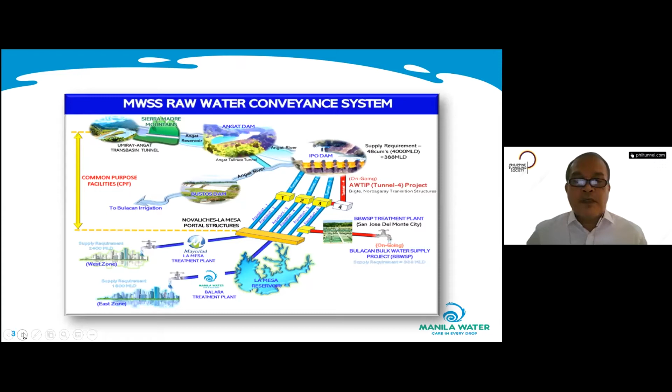Next slide, please. The water system of MWSS, our principal, started way back at the middle of Sierra Madre to Umiray River. Then there's an aqueduct that connected it to the Angat Reservoir, and then Angat Dam. Then it goes to a secondary dam called Ipo Dam. There are a series of tunnels that would connect Ipo to what we call the Novaliches portal, and from there, a series of aqueducts that convey the raw water to La Mesa. So some would go directly to the La Mesa Treatment Plant, operated by the other concessionaire, Maynilad, and the other 40% of the raw water would go to La Mesa and then to Balara.

Next slide, please. So from La Mesa Reservoir, there are 3 aqueducts that supply the raw water requirement of our 2 treatment plants there, Balara 1 and Balara 2.

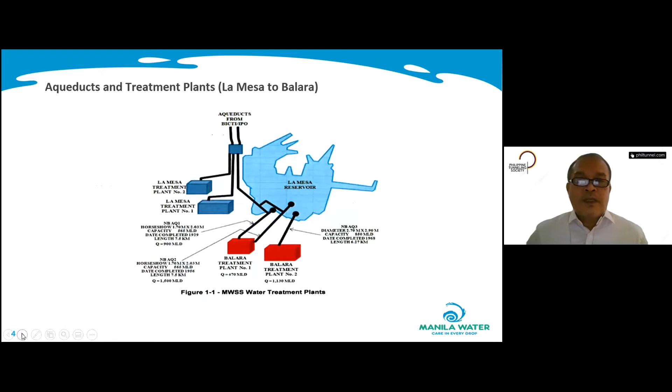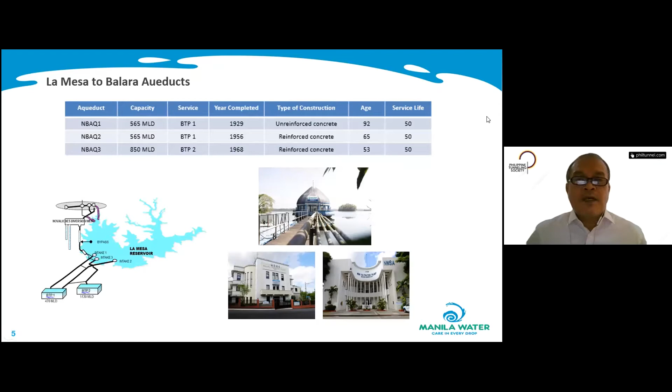Next slide, please. And as you can see, this is why we need to do NBAQ4 - the 3 aqueducts have actually exceeded their serviceable age, so there's really a need to replace these old aqueducts, which I will explain further in the next slide.

Next slide, please. The project was conceptualized as part of Manila Water's improvement and expansion projects throughout the concession area. We've already completed the potable distribution side - we've replaced more than 90% of the pipes on the potable side. Now we're focusing our attention on the raw water side. As I mentioned, there are 3 existing aqueducts that convey water from La Mesa to Balara that were built between 1929 and 1968.

That requires assessment and rehabilitation. Currently these aqueducts are being operated at capacity and cannot be shut down, because if we shut down one of them, the water supply in our concession area would be limited. So this project will improve the reliability and security of raw water transmission from La Mesa to Balara. It will provide a new aqueduct that will enable sequential temporary service suspension, inspection, rehabilitation, or replacement of these existing aqueducts. It will provide redundancy in case of failure of one or more of these 3 aqueducts, and will allow operational flexibility in the operation of the treatment plant.

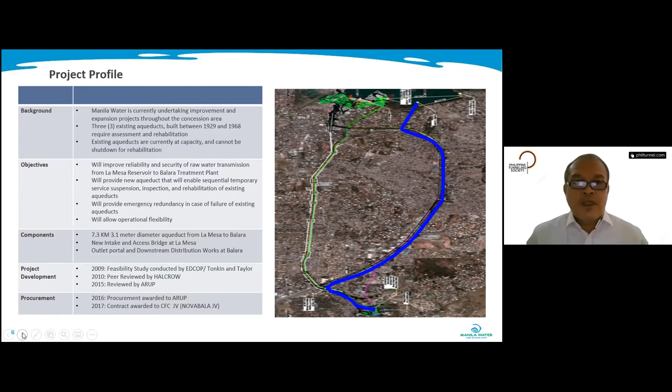Now I turn over the presentation to Rod to discuss the construction side of the project.

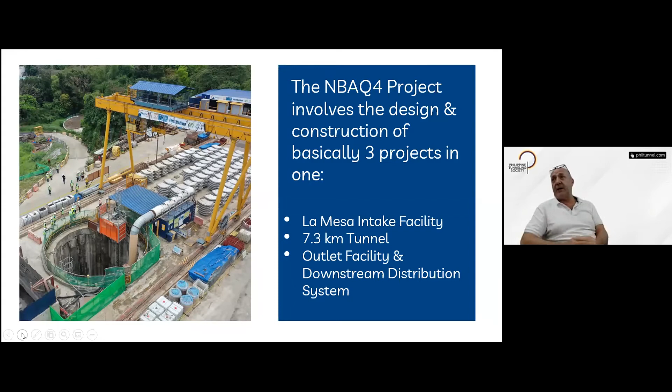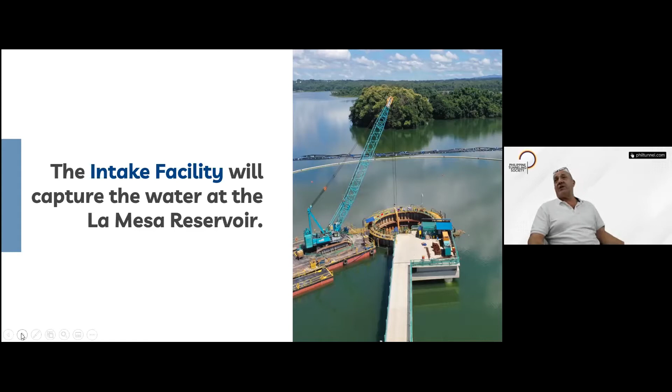The intake facility is a complex structure at the end of an access bridge in the middle of the La Mesa Reservoir, which is actually a very beautiful location on the northeast side of Manila, capturing all the water from the Sierra Madre Mountains through a series of dams and ending up in the reservoir. We built an access bridge and a very complicated temporary intake cofferdam, which allowed us to finally build the intake structure, which is actually the receiving pit for the TBM machine at the end of the tunnel.

Then, of course, we have the tunnel, which all you tunneling guys are massively interested in. It's the tunnel which will eventually channel all the water from La Mesa to Balara. It's 7.3 kilometers in length, travels the majority of its length under Commonwealth Avenue, and is generally about 50 meters below ground.

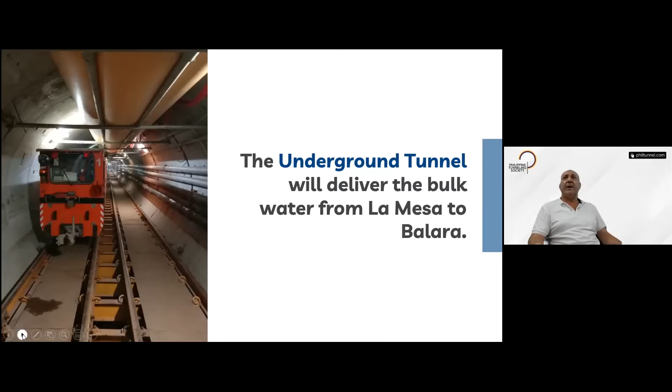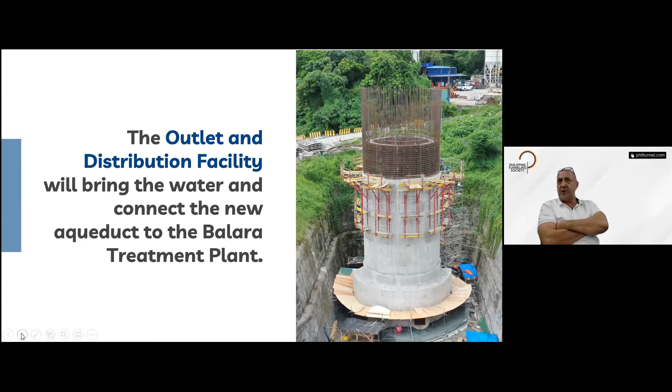Then, as I mentioned earlier, the downstream distribution system. Here you can see the outlet structure, still under construction. This is basically a surge shaft at the end of the tunnel where the water will rise from the tunnel, which is actually about another 35 meters below the structure. The water will rise vertically and then be distributed through a complex arrangement of piping, chambers, and such like into the treatment plant. So as I say, it's actually three structures, three projects, all tied into one.

Going back to the early days of 2017, there was a monumental amount of design work required to develop what was the concept design, initially developed by Arup. Once we secured the contract with our designer, GHD, they developed all of the designs for this complex project, using CFD modeling for all the hydraulic analysis from the inlet, the tunnel, and through all of the outlet structures.

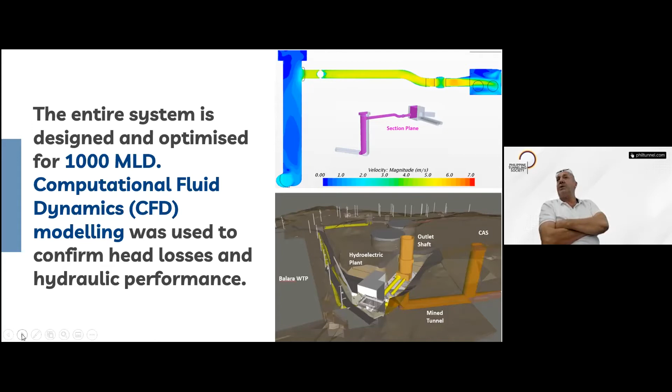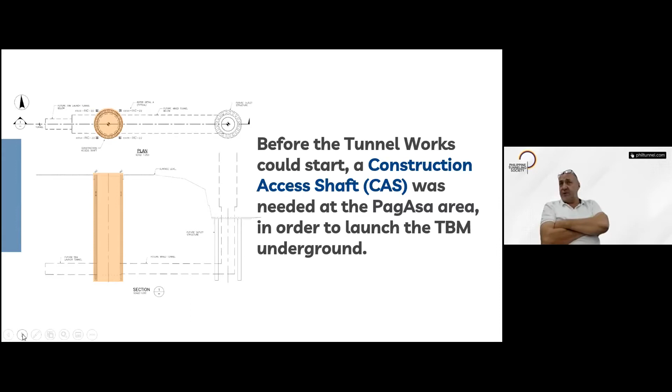After the design had been completed, which took a few years, the tunnel works could only start in the Pagasa area. In order to start, we had to sink an access shaft. Here's a simple schematic of the access shaft with the arrangement and connection to the outlet shaft, which you can see on the right-hand side of that sketch. That was built so we could install all of the equipment in the tunnel and assemble it to then commence the tunneling operation from Pagasa through 7.5 kilometers to La Mesa.

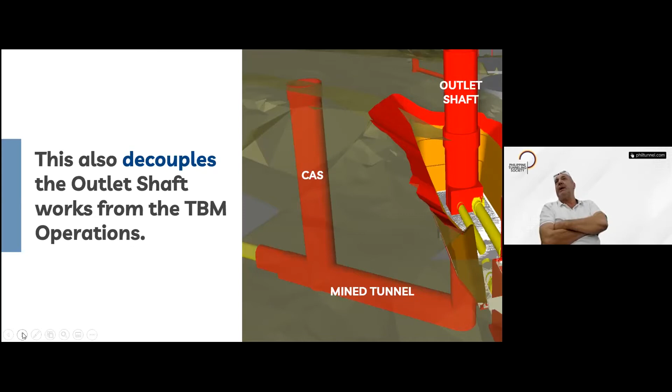Now, the outlet shaft also served as a structure, and the mined tunnel, which allowed basically the decoupling of the tunneling operation and allowed the DNS system to also be constructed separately and in parallel, all at the same time.

Now, the initial plan at the design stage for the outlet shaft, and even the access shaft, was excavation and then traditional bolting and shotcreting. But that method was never workable due to the soil conditions, so eventually the access shaft was sunk using a secant pile wall.

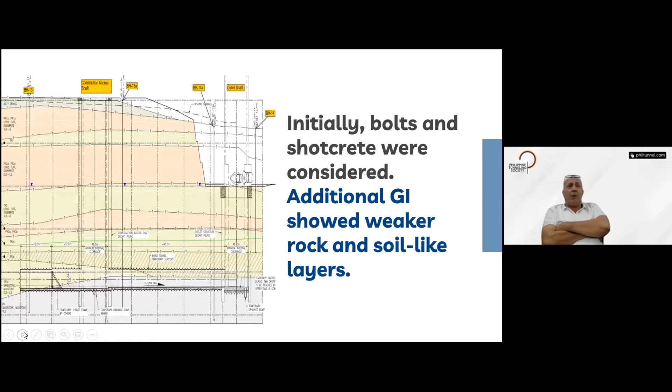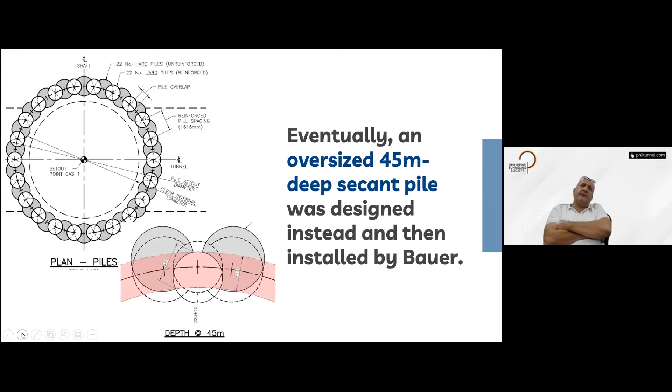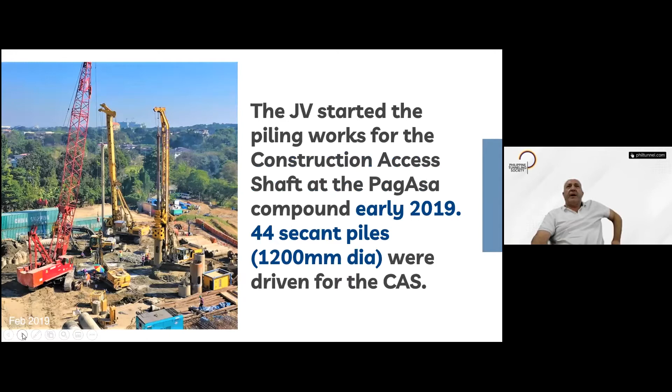Secant pile wall configuration. Here you can see a general layout of the pile layout that we used. This was basically a 9-meter diameter shaft with 45-meter deep secant pile walls, which was constructed by Bauer as our subcontractor, successfully back in 2019. And here we see a photograph of all these piling rigs from Bauer sinking the secant piles for the access shaft in order to allow tunneling works to eventually commence.

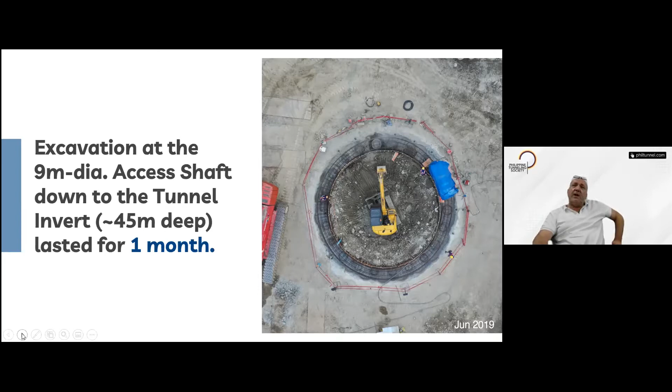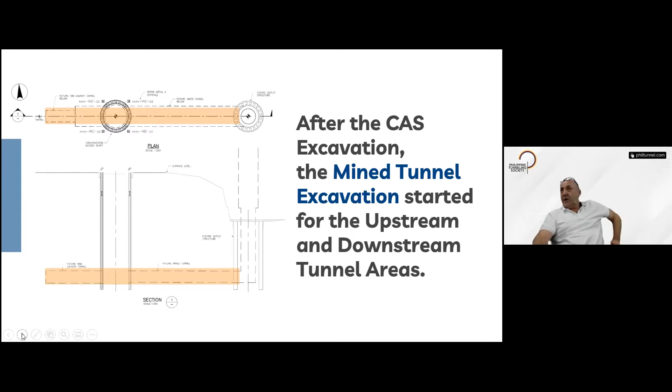Back in the early days, after the access shaft had been constructed and excavated, we conducted traditional forepole umbrella and drilling activities to excavate, with traditional methods, the mined tunnel section, which was just under 70 meters in length.

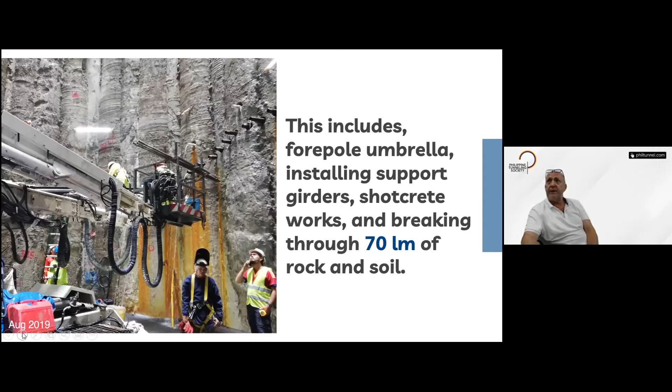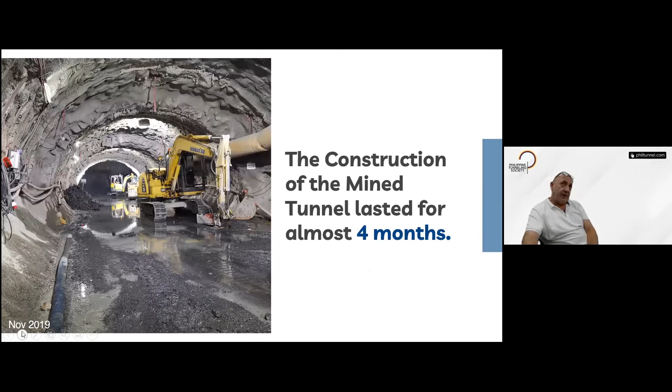Here, back in the early days, you can see the mined tunnel with all the supports, just ready for final excavation and cleaning, ready for installation of the rails and ready to receive the tunnel equipment in order to progress with the main tunneling works. That took approximately 4 months to set all of that up after completion of the access shaft.

And now you can see here where we then installed the rails and started installing our equipment, the locos and man carriers, for final access to assemble the TBM in the mined tunnel section and allow it to project through and carry forwards with the main tunnel.

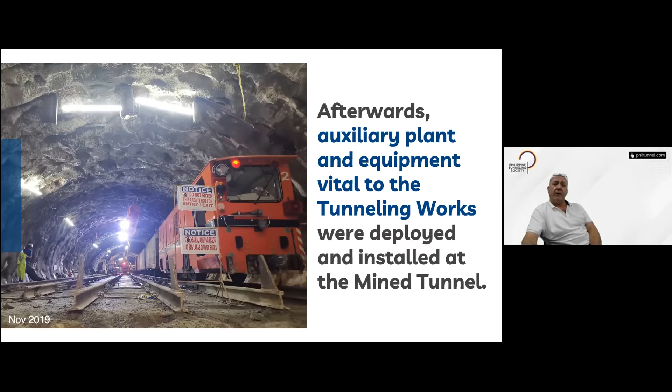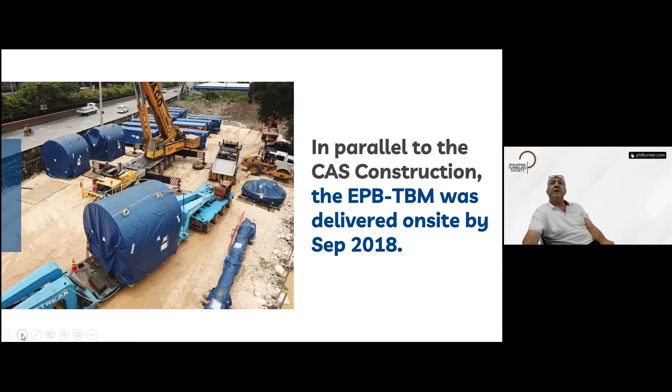Now, here is Dalisay, the TBM boring machine used to construct the NBAQ4 aqueduct. It's an EPB TBM. We purchased it as early as 2017, long time ago. It was delivered in 2018 through Herrenknecht of Germany, one of the world leaders in tunnel equipment. But this machine was actually constructed and fabricated in China, shipped here, brought to site, and assembled in preparation for the early works, with the tunnel commencing in 2019.

Here's an early picture of the TBM machine. As you can see, this is the main part of the TBM machine. It's about 12 meters long. It weighed in total, including all of the support structure and equipment that runs with it, which reaches close to just over 110 meters long, an all-up weight of 266 tons. But this is the main head of the TBM machine, cutting through to the main section and tail skin.

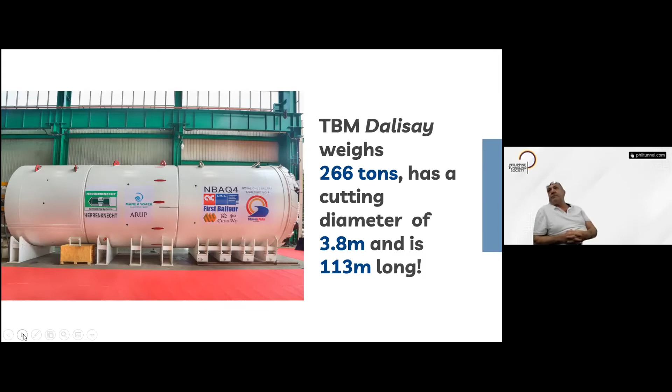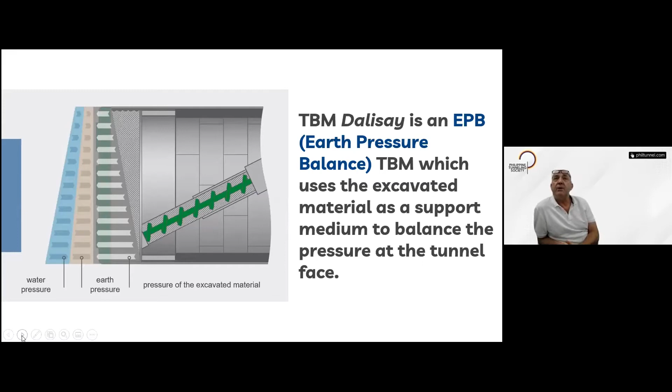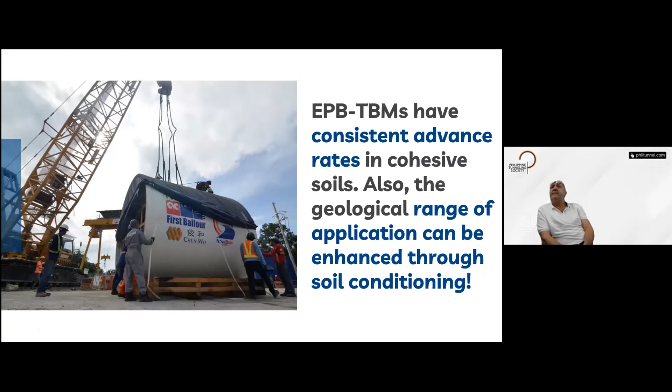So the TBM was eventually launched through the access shaft in January 2020. As you can see here, this is just one section of the machine of 3. They were all lowered down the access shaft and then reassembled along with all the backup gantries and support equipment, which are close to 110 meters long, in order to proceed with the tunneling operation.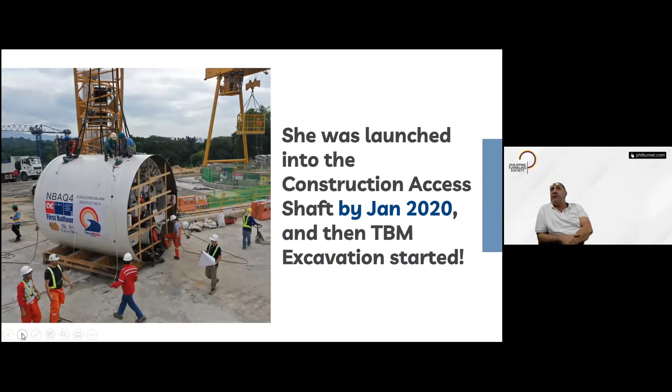Again, here is a sectional view of our TBM. It's actually an articulated TBM, because in this particular tunnel we had very, very tight bends to navigate in 2 sections, approaching and leaving the underground areas of Commonwealth Avenue. Those tight bends resulted in an 80-meter radius. Therefore, to be able to excavate and turn around those tight bends, the machine basically had to be able to articulate. That's why the machine had 3 main sections, allowing movement for negotiating these tight curves.

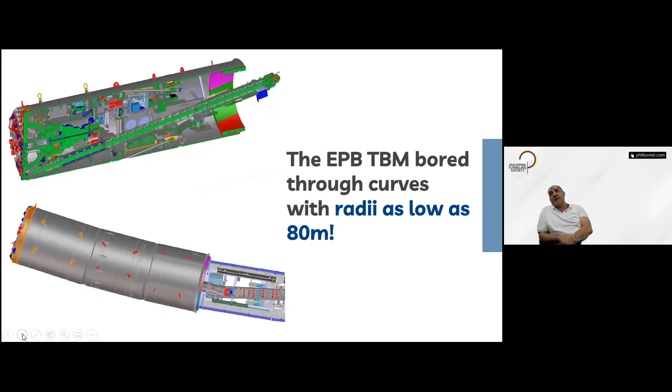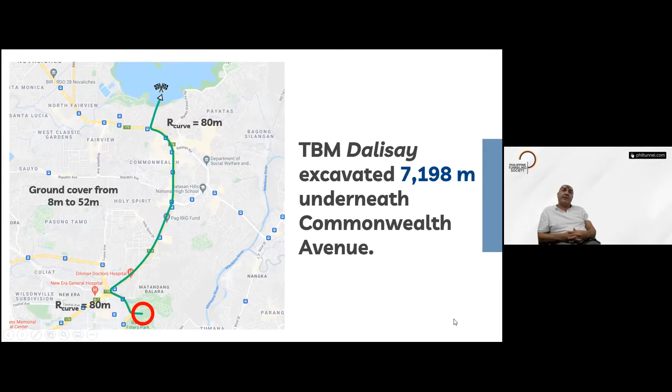Now here you go, is a lovely overview of where we are in Manila, from Balara down the bottom at the Manila Water Treatment Plant. You can see where we come out under the C5. We turned the tight bend, 80-meter radius, onto the Commonwealth Avenue, and we've travelled all the way up under the Commonwealth Avenue, adjacent to the MRT7. Very, very challenging tunneling works. And you can see at the end, turning off again with a very tight radius, and eventually carrying forward into the La Mesa Reservoir.

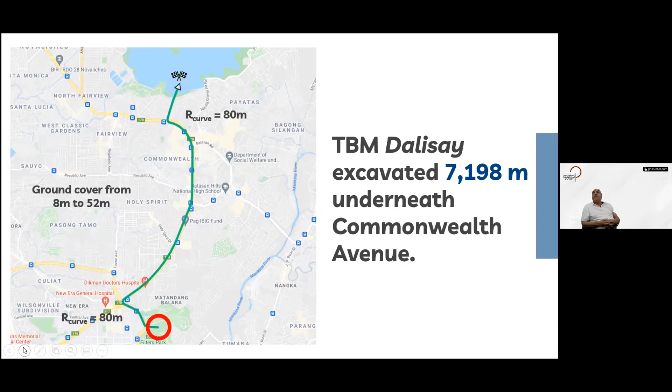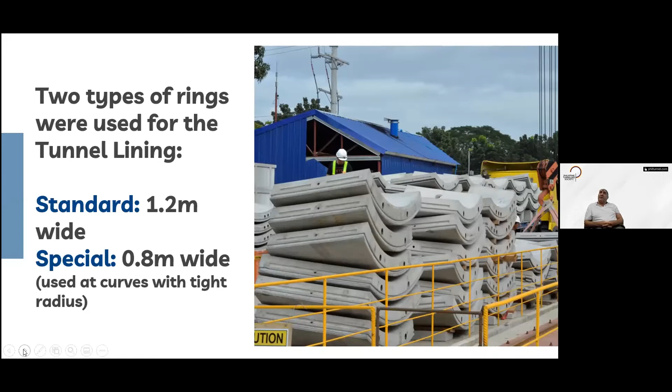Now, in order to line our tunnel, we had to precast thousands of panels. These were successfully precast in a specialist precast facility by First Balfour, and they achieved fantastic results in quality, producing 2 sizes of panels: the 1.2 meter panels for the straight, slight curved sections of the tunnel, and then reducing to 0.8 meter wide panels for where we had to negotiate the tight curves. All of these panels are placed by the TBM machine as it's excavating and cutting the tunnel path.

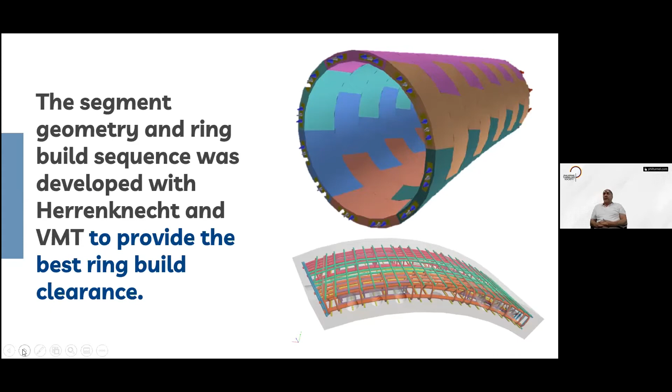Now, the segment geometry and build sequence was developed specifically with Herrenknecht, the manufacturer of the machine, and also VMT, who are the providers of the guidance system. They came up with a very complex and analytical approach and optimized the panel array, as you can see in these sketches, to give the best finished product for the precast concrete lining of the tunnel.

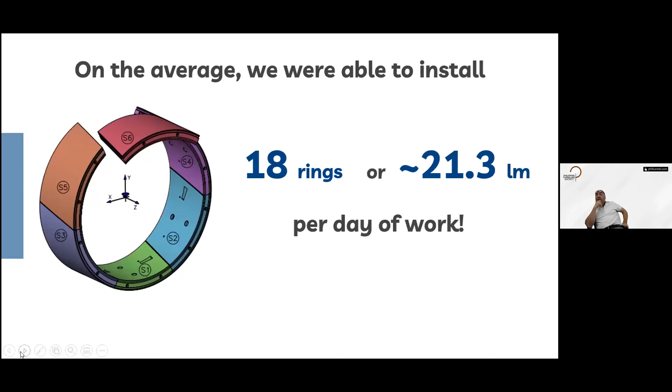Now, the production rates that we achieved on this tunnel were remarkable. We exceeded the tender expectations by far. And I think one of the most fantastic achievements about these production rates is that they were achieved entirely through the COVID lockdown period of 2020 and 21. We achieved an average of 18 rings, which equates to just over 20 meters per day of work, which exceeded all expectations from what was envisaged at tender stage and moving forward.

It created massive challenges and issues, not only for this project, but for all projects and for everybody's life in general in Manila. But we're very proud to share this achievement, and what our tunnel team achieved was fantastic. We had breakdowns, we had issues, but we persevered and managed to produce these amazing outputs with our TBM machine, which is all down to various aspects: correct design, investing in the correct machine with the correct methodology, and having the correct people, experienced tunneling crews to produce these results.

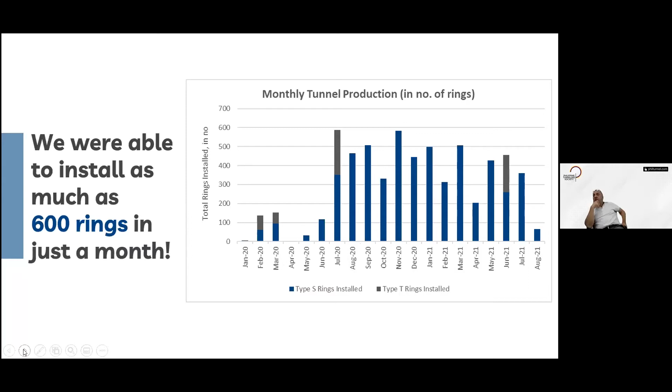So we'll move off from the tunneling and on to one of the other parts of this project, and that's the La Mesa intake.

Now you can see here, back in 2019, Manila had a massive water shortage, and this is an aerial shot which shows La Mesa Reservoir at that time and the existing intake structures with such low water levels. What's also amazing is that La Mesa Reservoir is a natural catchment area, but it's also a dam. On the right-hand side of this aerial shot, you can see this intake structure, which was built way back in the 20s as an earth-filled dam, built nearly 100 years ago. And 100 years later, we've just built a tunnel into that La Mesa Lake.

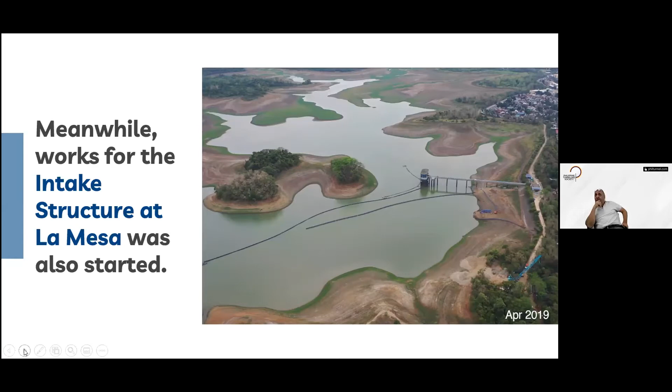Remarkable. So one of the biggest challenges of this project was getting out into the lake where we could build the intake structure. The intake structure had to be in the deep section of the lake so that it could operate at all operational levels of the La Mesa Lake. So we had to build an access bridge, and we increased the dimensions and structure overall so that we could use it eventually as a construction route to build our intake structure and temporary cofferdam in the lake.

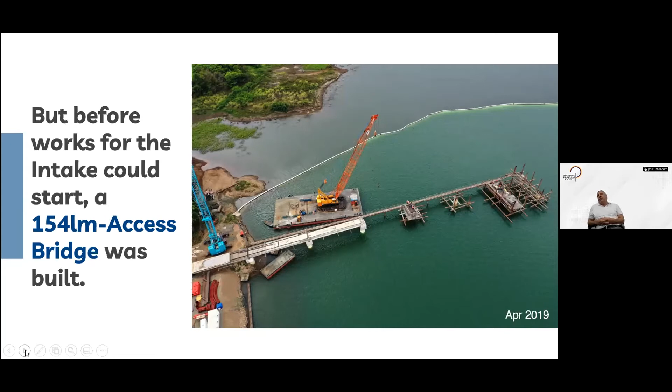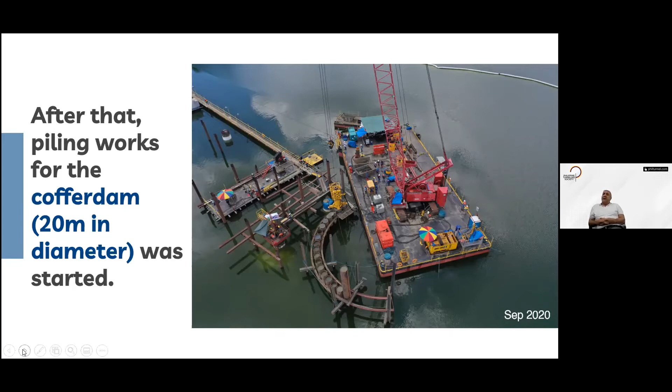Here you can see the access bridge still under construction. And here you can see our construction equipment, our barges, piling hammers and cranes, where we commenced driving of the cofferdam. The cofferdam was built as a 20-meter diameter temporary structure in 15 meters of water, in order to provide the correct environment for us to eventually build the intake structure and receive the tunnel boring machine.

Here you can see the cofferdam after we had constructed it, and it consisted of 56, 25-meter long steel casings, about 950 millimeter casings. We were able to drive all of those piles and sink them into the underlying strata of the lake and close that circular cofferdam. It was a fantastic achievement, done in just under 7 months. And here you can see when we started pumping out to give us access to the lake bed in order to allow construction of the intake structure.

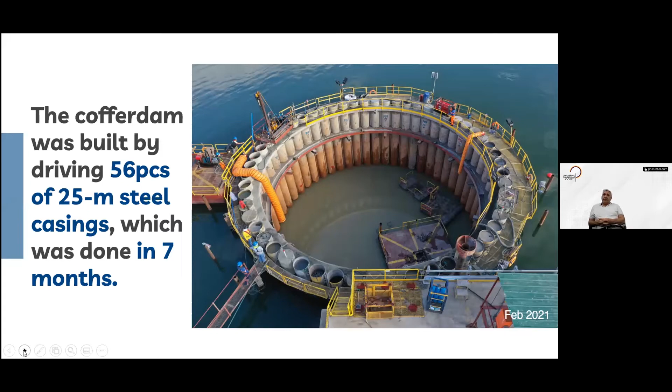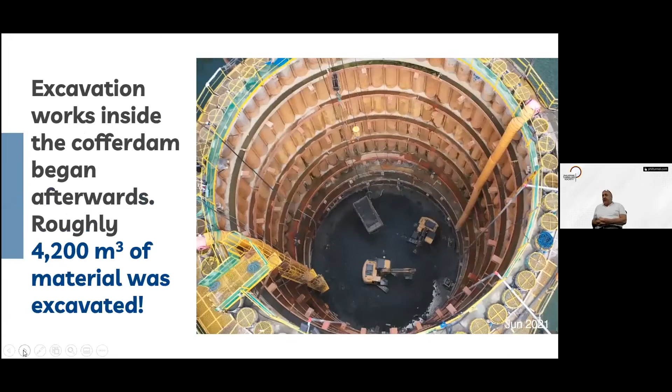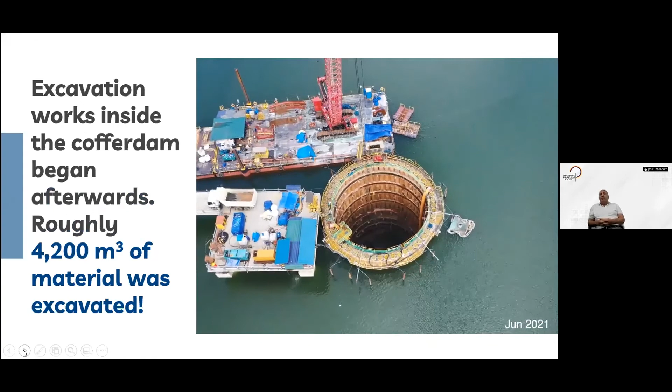Here, a short video of the excavation process. Once we got to the lake bed, at 15 meters depth, we had another 4,000 plus cubic meters of material to excavate out of the lake bed into the hard strata below to provide the eventual receiving structure and pit for the tunnel boring machine.

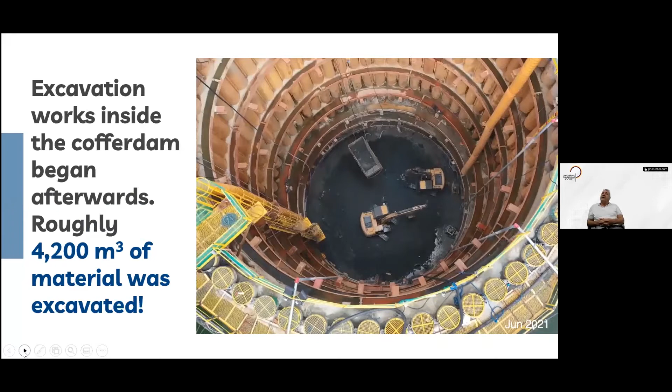After excavation of the cofferdam and lake bed, we then constructed this receiving pit, which allowed for the eventual cutting through of the TBM under the lake and into the dry environment of the La Mesa intake structure.

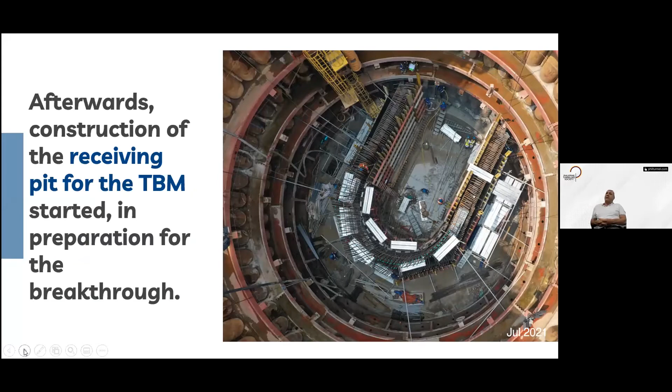And here you can see the successful day inside the La Mesa intake structure when the tunnel boring machine eventually broke through in early August of this year. That was 18 months after commencement, and basically it was built in just under 16 months.

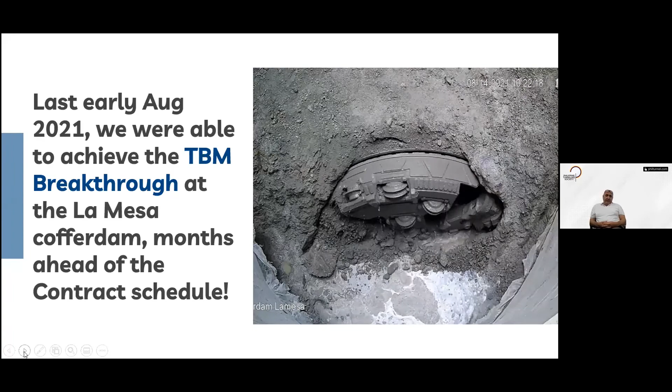It was a fantastic achievement, 16 months for the Dalisay TBM to excavate from Balara to La Mesa Reservoir. We actually achieved that approximately 4 months ahead of the predicted contract schedule, which was without doubt a fantastic achievement.

In order to celebrate that achievement, we carried out a virtual ceremony, a virtual breakthrough ceremony, because we were unable to invite all the guests and witness the true breakthrough at the time, due to the onslaught of the ECQ and restrictions in place. But the virtual ceremony was very successful.

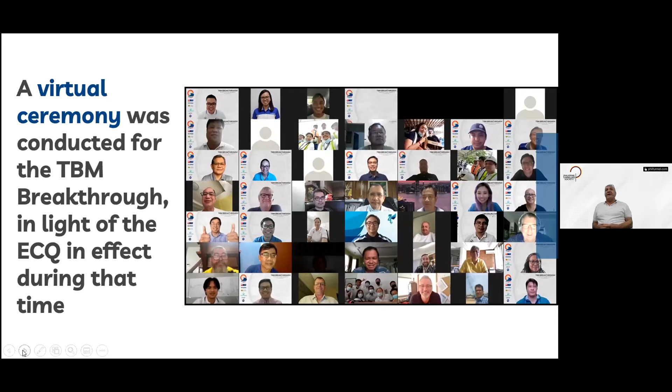We had hundreds of people online, and here you can see a lot of the pretty faces who joined in on that show.

After the event, Manila Water proudly announced the facts, the results, and the success of what, without a doubt, for Manila Water was the closure of a 10-12 year plan and a massive risk and a massive cost. There was a lot of relief when we managed to achieve a breakthrough of the tunnel in early August last year.

It was the succession of all of the thought process and ideas and dreams of Manila Water, and this was the fruition of all those hard work and dreams of all of those senior people in Manila Water from years ago.

After completion of the breakthrough and TBM machine arriving in our cofferdam, we then had to dismantle the TBM. That was a complex task also, because this machine really wasn't built to be dismantled.

It was built and assembled in major sections to be put together in a very simple way at the beginning. But the actual thought process of dismantling it took a lot of thinking out and working out, and very tricky, heavy lifts, because all of this has to be done in the marine environment, stripping the machine part by part.

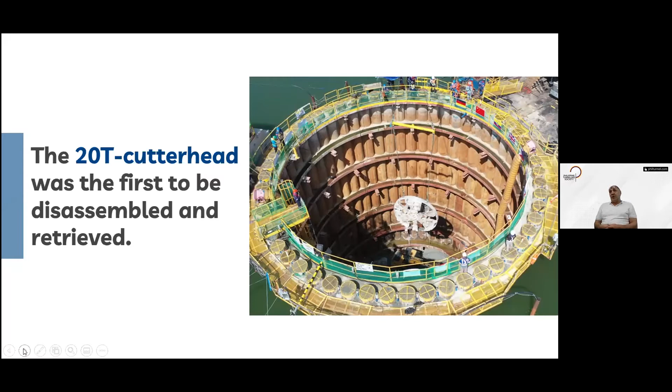Here you can see the cutter head, and the cutter head alone was a 20-ton piece of machinery, which had to be lifted out from the crane on the barge, lifted to another barge, and then dispatched to the shore for eventual travel back to Balara, where we are now currently reassembling the machine for its next challenge in life.

Here you can see the final sections of the machine being dismantled and ready for lifting out. We've just achieved that over the last few weeks. It's a fantastic result again, successfully removed, and we're now hard at work building the intake structure from this pit above in the depths of the La Mesa Lake.

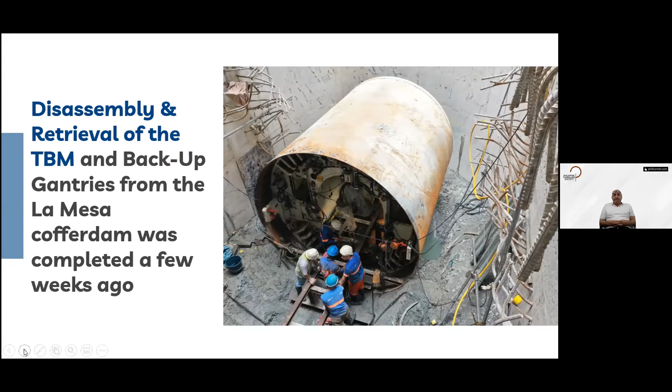So we'll step back now from the tunnel and the La Mesa Reservoir, and we want to discuss another tunneling aspect of the NBAQ4 project, where in the downstream distribution network system we have kilometres of pipes to lay at great depths, 10, 12 metres below ground, and there were sections that were impossible to be excavated.

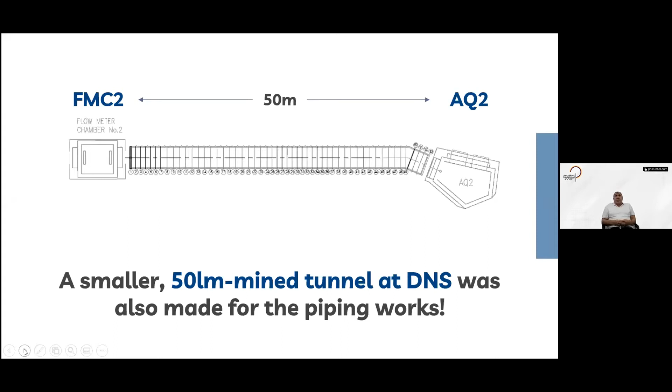The eventual solution was to come up with a traditional 50-metre mined tunnel between two areas of the downstream distribution network. This was also done very successfully with our team using traditional mine tunnel methods.

We created the open pit access shaft area here. We did traditional drilling and excavation by machine, and achieved good productivity in a safe and successful manner over this 50-metre mined tunnel excavation.

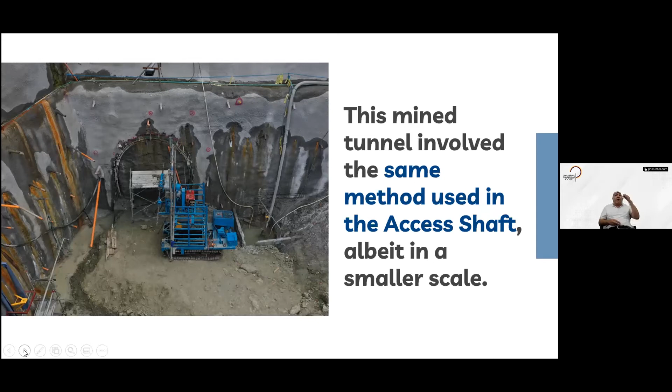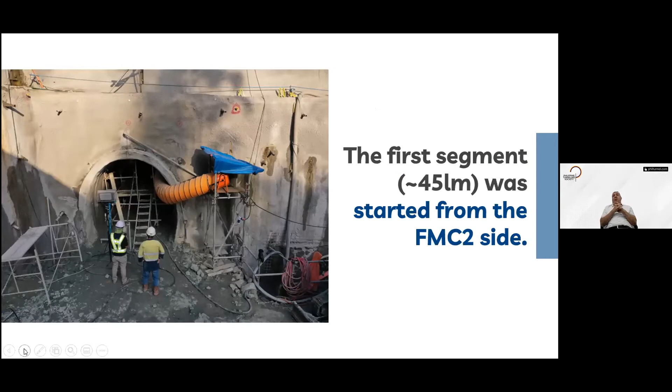So we actually constructed the tunnel from two sides. We commenced from the west side and excavated about 45 metres of the tunnel. We did that in order to get ahead, because at the other end of the tunnel we still had a major area of excavation.

So we took advantage of pushing ahead and putting 45 metres of the tunnel through in order to allow us, when we did complete the excavation at the AQ2 side for the major pipeline structures and connection areas, to then break through the last 5 metres of tunnel and connect the tunnel up between this 50-metre section.

That took us about 3.5 months, and again was a great achievement, all achieved in a very safe and successful manner.

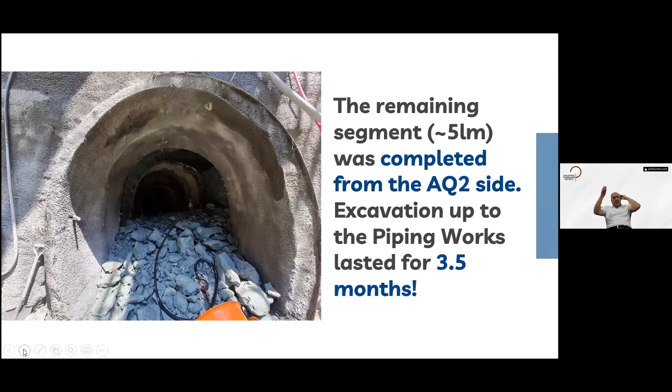Approximately 12 to 15 metres below the overlying structures and ground, that's basically an explanation of what's been done to date. The tunnel is now complete, and it's going through the dismantling of all the utilities and pulling out all of the equipment and final inspections while we construct the second part of the project, the La Mesa project.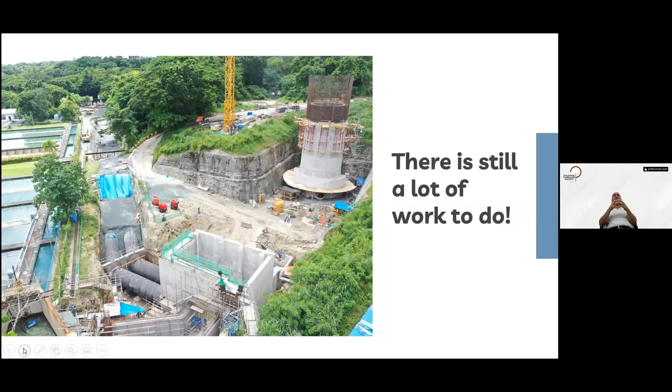Now, the existing utilities that are in place are aqueducts that are supplying water from La Mesa, that were built, in some cases, 70 years ago.

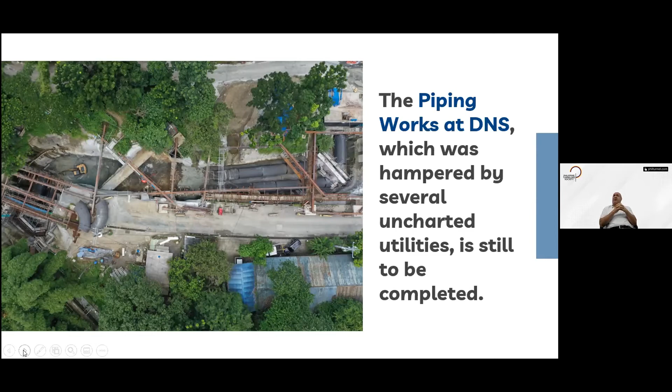You can see here in this aerial shot, again, the new pipework that's being installed in these open excavated trenches under existing utilities, which are, in some cases, 60, 70 years old. And we've had to put in place massive temporary structural steelwork supports in order to support all of these utilities. And like all projects, a lot of these utilities were unknown, which created additional challenges and interest for the project.

Again, here you can see some of the structures. And this is actually the end of the main tunnel section. The main tunnel section is underneath the ground on the right-hand side of the structure, to the right of that major structure there.

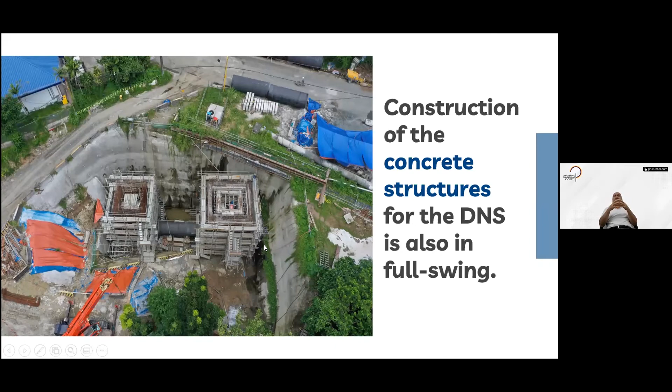So once we complete the network of downstream distribution, we have to connect these structures into the existing live waterways that are providing Metro Manila's water supply, because we can't turn it off. So these are some of the challenges that we face.

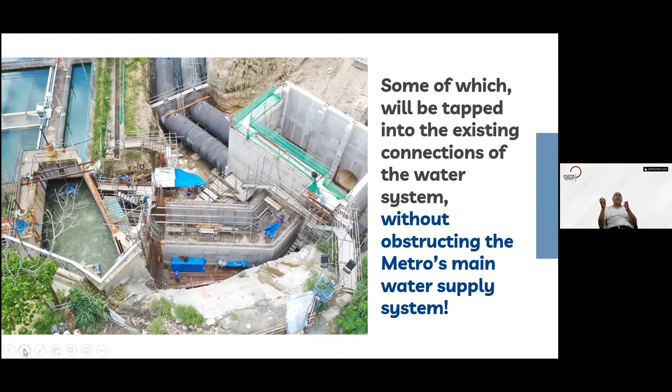We've got 3 live connections to construct. We've got a very, very complex temporary works arrangement designed that we will insert and construct inside the live pits, which are running at full capacity with water, because we can't turn the water supply off to Manila. And we will break through into the existing structures in a live condition to eventually allow the connection of La Mesa and the NBAQ4 pipework system to supply water into the Balara Treatment Plant.

So back to our intake structure. The TBM has now been removed, and here we're just doing the final cleaning out and ready to start the first construction lifts: concrete rebar, traditional walls, circular shaft, which will also contain the access gates to control the water flow in and out of this system.

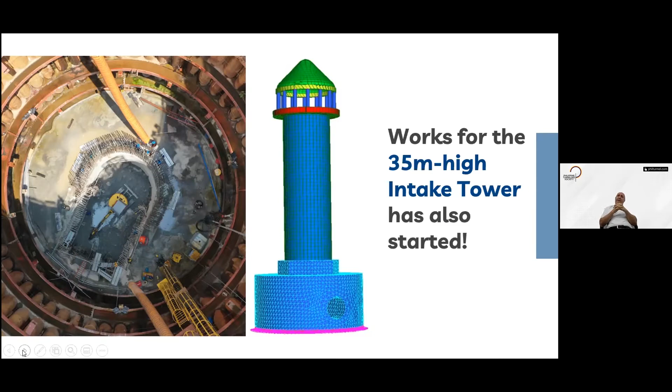And eventually, this magnificent structural steel cofferdam that we took 7 months to build will eventually be removed, and a concrete intake structure will be left in the La Mesa Lake.

Now, the next stage of our project at the moment is the complex electromechanical installation. So all of this magnificent civil work, tunneling work, marine work is basically coming to an end by the end of this year. And in the coming months, we will commence all the complex installation of the valves, flow meters...

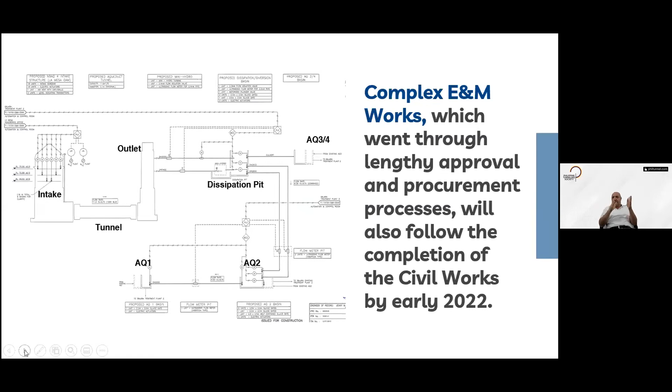...and control systems that will eventually give Manila Water the ability to monitor and operate the intake of water at La Mesa, and then automatically control all of the valves and distribution of water through the 3 AQ connections to the Balara Treatment Plant.

All of that complex, expensive electromechanical equipment is now being shipped from all over the world, again through another very complex procurement - well, first of all, design, approval, and procurement process. And now we're at the stage of bringing all these materials in from all over the world, from America, predominantly China, Germany, Belgium, all over the place.

And all of that equipment, some of it's here, and a lot of it is now arriving, ready for the complex E&M installation, which we will carry out over the coming 2 or 3 months, and moving on to the final test and commissioning phase of this project in the first quarter and mid of second quarter of next year.

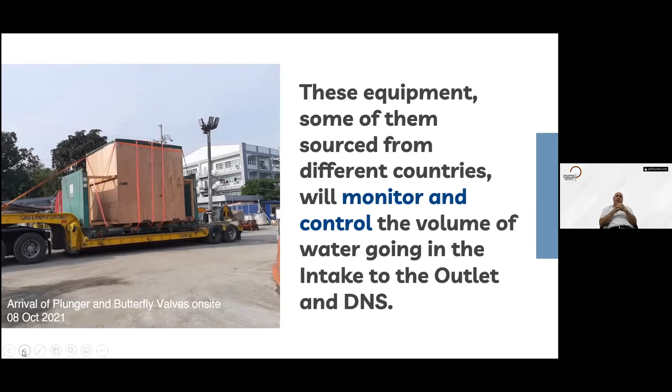So that's basically a summary of the NBAQ4 project, what's been achieved to date, where we are and where we're going. We've achieved that with utilization of close to 3 million man-hours of work by our team. It's a fantastic achievement, a very, very challenging and interesting project, achieved under challenging and interesting circumstances, and all through the last stage of this project, the last year and a half under this COVID pandemic.

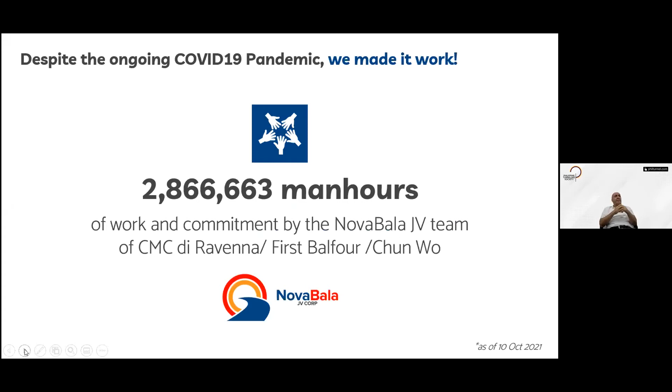So just in closing, like all magnificent projects that we're all involved in, and I'm sure all of the guests here today have been involved in some magnificent projects, tunneling projects, building projects, infrastructure projects. And one of the projects we are coming to close on recently with our partners, Acciona and DMCI, is the Cebu Link, the third Cebu Link bridge.

Now, everybody who's been involved in projects like that, they're without doubt iconic, wonderful masterpieces of engineering that are there to be seen and treasured for all those who build them and all those who just like seeing fantastic engineering projects. And they're there to be seen forever. I'm sure if you look on Facebook and social media just now, you'll see lots of magnificent photographs and pictures of the Cebu Link Bridge at night time and daytime. It's an absolute magnificent bridge, and it's a magnificent engineering achievement.

But what I would just say in closing is that the NBAQ4 tunnel project has been a magnificent engineering achievement, constructed under very, very difficult circumstances. But at the end of the day, the only thing you will see is a small intake structure in the middle of La Mesa Lake, because all the magnificent hard work and effort that's gone into it is all hidden below ground. And also everyone can take for granted when they turn on their water supply, they've got a never-ending supply of water. So let's move on and close on what's been achieved.